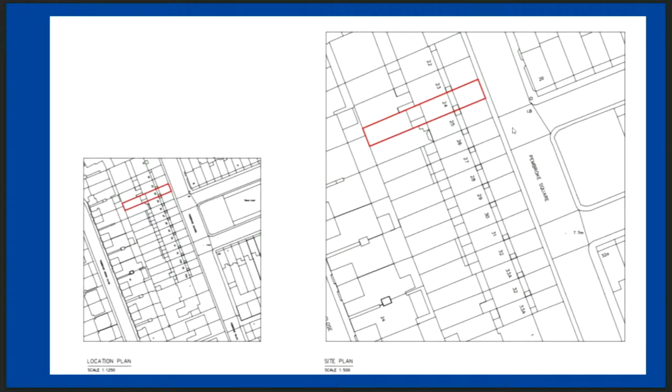As you can see from the front, this is the property indicated by the red dot. It's actually a facsimile of what was there before the war. It was rebuilt in 1949 with the front exactly the same as existing, but the rear somewhat different. Turning to the rear there, you can see it has kind of a 20th century appearance.

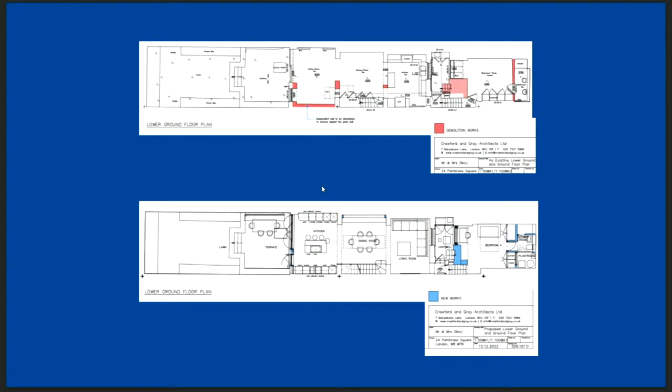Turning to the plans, you can see some of the internal alterations, with the demolition works highlighted in red and the new works in blue.

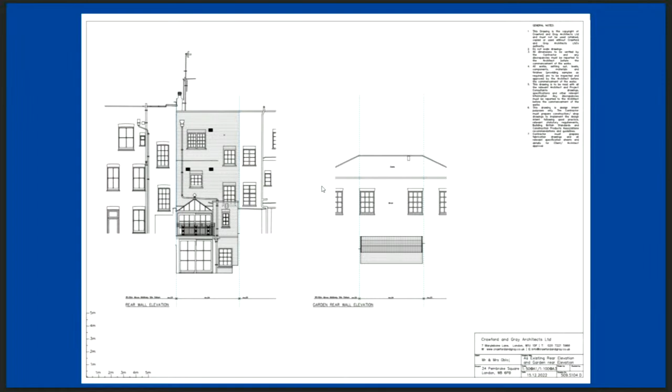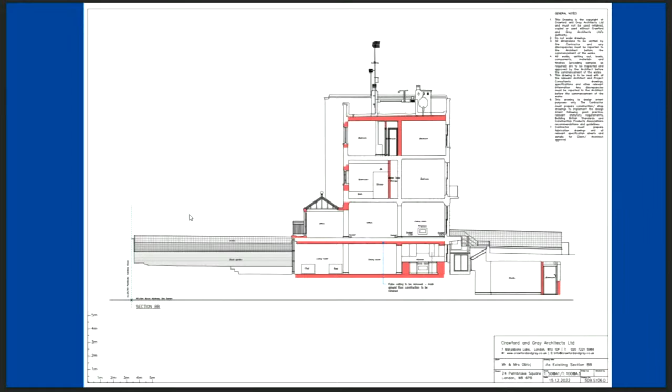Again, some sections through, showing the new works, and there's also air conditioning proposed on the roof to serve the bedrooms on the top floors. That concludes my presentation, Chairman. Thank you.

Apologies, thank you, Lorna. Just to draw members' attention to the addendum report, because we have sought to amend condition 10 on both applications, which relates to the fireplace and how that is secured to be installed before the development is finished and complete. Thank you.

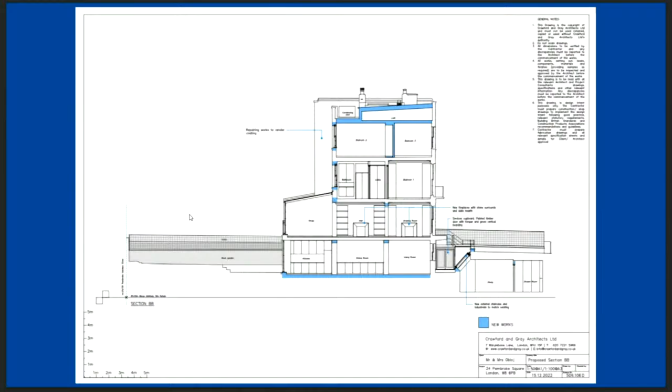Good evening all. I'm speaking tonight on behalf of Tim Honour, who's at number 25 Pembroke Square, and wish to raise a few concerns which are meant to be constructive criticism and helpful.

The first concern is the significant disruption it will cause for, in our view, very little benefit for the owners. The significant number of beams proposed means the disruption will be worse, for little benefit. That may also harm the character of the home by creating large open spaces perhaps not in the nature of the properties, but we appreciate that's entirely subjective. Others may have different views.

Turning to the proposals, the air conditioning unit, in our view, is an unnecessary luxury in our current climate, especially in buildings that have basements. In fact, in many listed buildings, outdoor air conditioning units are banned by planning authorities. There are concerns over noise and vibration, and it's difficult to see how the unit will be adequately maintained once installed, so some assurance on that would be useful.

The unit, combined with the proposal to enlarge the windows, will clearly cause deterioration in the EPC, surely the opposite of policy given the climate emergency. It may provide some comfort if planning conditions ensured suitable installation on all of these issues.

The extension to the rear appears to be taller and deeper than others already in place. The additional building will reduce the light into 25 Pembroke Square on the landing, as well as limiting the outlook and giving a sense of enclosure. Whilst I'm sure the statutory light rules are fully complied with, it will clearly reduce light to a steep set of stairs, which seems dangerous and unnecessary.

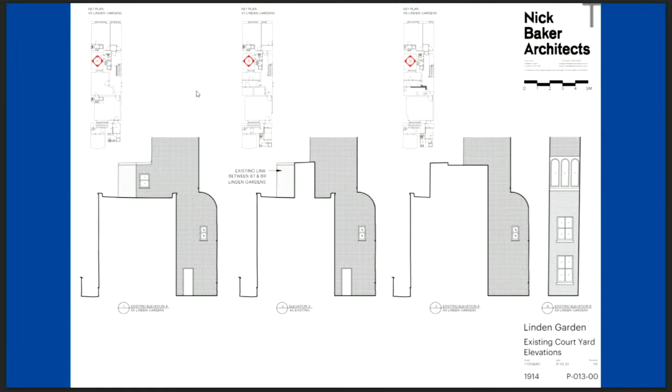Overall, the changes to the building officers see as very positive in terms of the impact on the people living there. As currently arranged, there are lots of very small units. If you look at paragraph 6.2 of the officer report, it explains exactly the layout and arrangement as existing and compares it to the proposed.

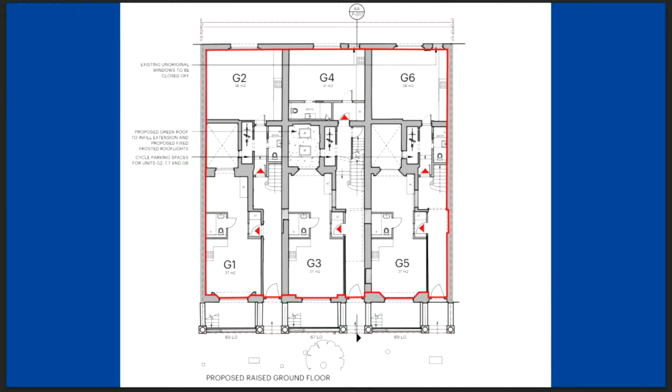I think this is really important because what we've had to do as officers, and what members will be looking at this evening, is balancing out whether the new arrangement is better, which we are happy that it is. But I'd draw your attention to unit G4 to the rear of the raised ground floor, which is slightly smaller than existing and slightly smaller than we would normally expect, but it's still on balance better overall within the building, as with some of the other units at lower ground floor level.

So officers are recommending approval and are happy to answer any questions. Thank you.

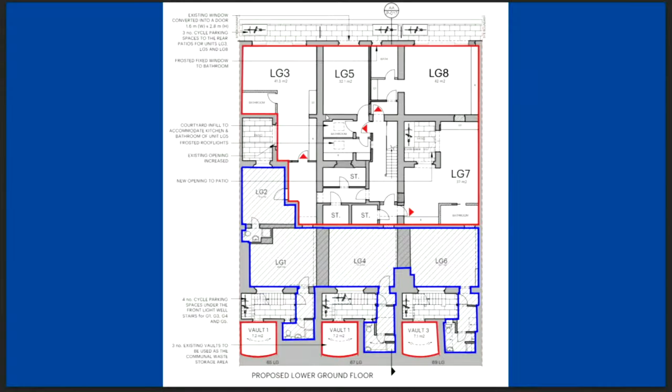So again, we have speakers for this, so I'd like to ask Sebastian Millett, please, for the objectors. You have 3 minutes, sir. Do you want to put your microphone on? There you go. And if you could speak into the microphone, then we all can hear it.

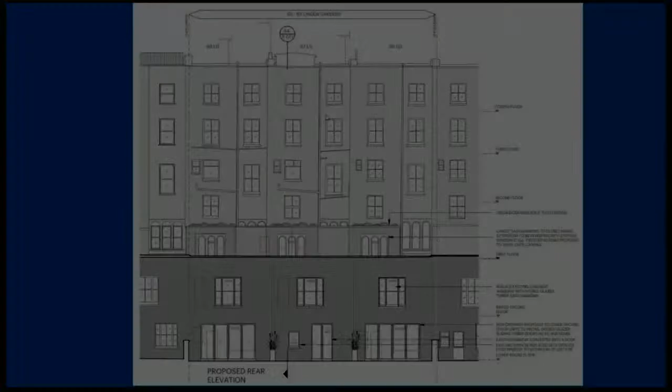Seeing those large sliding doors just puts the fear of God into me. My children are sleeping 3.5 meters away from those doors on the other side of those little backyards. I've lived in that building for 55 years, and I know very well how acoustic that well is, where those backyards are. When my children were born and we were bringing them up, we called that backyard, our one, the Whispering Garden, because we knew how much other neighbours would hear their noise when they were playing there.

I don't really understand why it has to be those sliding doors. All the other basements have, like we do, just a normal sash window with a door to go out there, and those doors, when they open, the noise will be absolutely horrendous. It's a studio flat, so that means television noise, not just bedroom, you know, kitchen noise, kitchen smells. There's an awful lot of marijuana smell coming from that building, and has been for a very long time now. I don't know if that's just the nature of small studio flats, but we live and experience everything that goes on in that building ourselves.

And God help us if they are used for short lets and Airbnb, that would just be even worse, with people moving in and out late at night and so on. We're surrounded by Airbnbs in Linden Gardens. I don't understand how any kind of sound baffling could work, which Councillor Joanna Gardiner has mentioned.

My second concern is that there's very little natural light coming down into those basement wells, and I don't know how carefully calculated it's been that this extension of the first floor, the rear first floor coming further out, will affect the natural light for us.

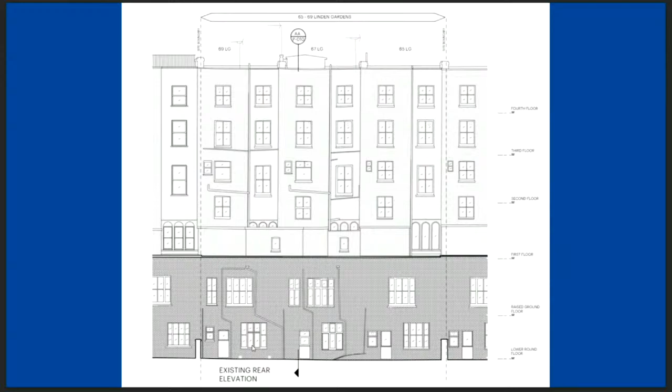So you can see here at this lower ground floor level, there's a door and an opening. So we're looking at the existing openings that are there. And when we compare that to the proposed, it is larger, but not so large in terms of noise to raise any concerns.

In terms of appearance, we're not concerned, again, because it's at the very lower ground floor. We still have a good degree of solid to void on the back there for a lower ground floor level. So that's why we've come to the conclusion in character and appearance terms and amenity terms, we're happy with it.

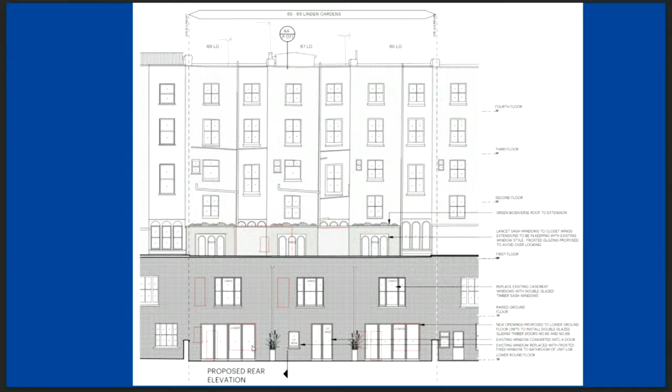Thank you, Chairman. We heard from the applicant in relation to the height of the wall that they would be happy, correct me if I'm wrong, to raise that height to just above head height. I understand from the objector it's just below head height. Is that something in legal terms that we can condition? Is that something you'd be comfortable conditioning?

Sorry to be difficult, I wouldn't really be comfortable with it because I don't know, that could have implications on the neighbours to the back in terms of light or sense of enclosure. Because it is so tight around there, a fence up against their boundary could have other impacts. So it would satisfy noise, but light, outlook, sense of enclosure could be affected.

So I think it would be a case of considering the openings that are there. Is that enlargement of the opening harmful? And going from there, that's the best way to consider it. Thank you.

Any other questions?

Okay, then we need to come to make a decision, and the recommendation is that we authorise the Director of Planning and Place to grant planning permission on the satisfactory completion of an undertaking or agreement to secure the matters of Section 7 of this report and with the conditions listed in Section 9 of this report, or to refuse, as you see in paragraph 2. So, it's recommended the committee to authorise the Director of Planning and Place.

Thank you. Just one slide for you on this application to show you that a basement has been previously approved. The application before you this evening is for details of a condition attached to that relating to contamination, the full wording of which is in your pack. Our contaminated land officers have reviewed the application in detail and are satisfied with the submission.

There has been a refusal on this site to discharge the same condition before because the information wasn't good enough for environmental health, so they recommended refusal. But they are now satisfied that we have the information we need to meet the reason for the condition, and so we've agreed with them and recommended approval. Thank you, Chairman.

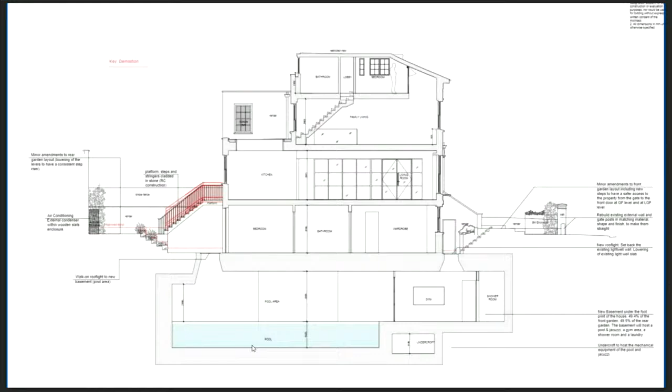Thank you. We do have speakers for this, so Fabio Ganza, who is going to speak objecting to this proposal, to the application. Fabio, you have 3 minutes.

Thank you. Good evening. My name is Fabio Ganza. I'm the owner and resident with my family of 17 Ladbroke Road, the adjoining terrace house. And the text that I'm reading has been agreed with Pierre Muretil of number 13, the adjoining owner on the other side of the applicant.

Considering the mitigation measures and not addressing the contamination risk, we firmly object to the application. This project has two specific characteristics for a residential property.

First, the property is adjoining land that was used for over 30 years as an oil product depot with several underground tanks for a total capacity of more than 26,000 liters. At least one tank was in close proximity to the applicant's garden. Documents produced for the works in that area describe very clearly the situation found and risk posed by the contaminated soil.

Second, the project excavates soil to a depth of 8 meters below the relevant ground level, a depth hardly seen in a terrace house in the area. These two factors make the project deserve a much more detailed approach to the mitigation of contamination risk.

We and other neighbors have highlighted 3 main areas of concern that have not been properly addressed in the application and our officer report. Number 1, soil investigation reached only a depth of 3.5 meters, while the excavation will reach a depth of 8 meters below the relevant ground level. Why has an analysis at deeper level not been done?

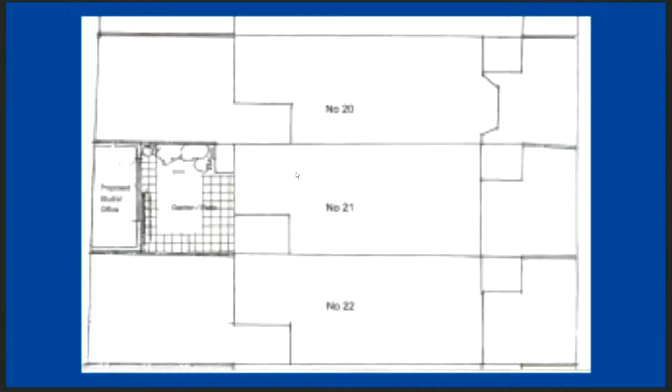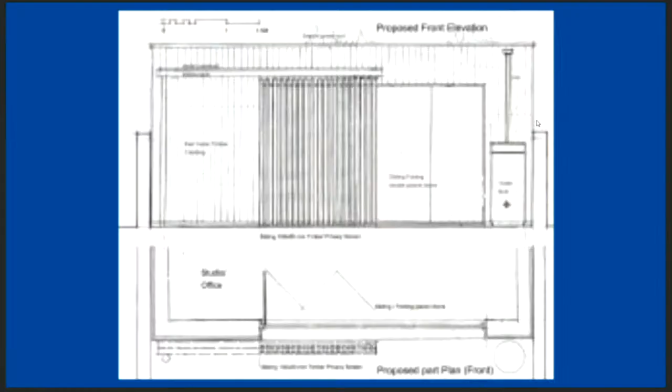Objector: The pictures that you showed of our gardens are deceiving. This building is going to take up quite a big space. It will also project probably 1 metre plus above the walls.

Sorry, what else did you ask me? Councillor Lane: You mentioned in your objections that this was built essentially for profit and that the applicant might be making conference or business calls - my question was... Objector: A developer bought this property at auction, and his only concern is to make as much profit as possible, whatever the outcome. Councillor Lane: My question, just finally, is that this is not principally a planning concern, and I apologise - people are allowed to make profits?

Thank you. But may I just say something else? If it's related to the question - the screens that he's talking about, which will block out light if they are obscured, already face the wrong way to get hardly any light. So I don't understand what light obscured glazing would stop getting in there.

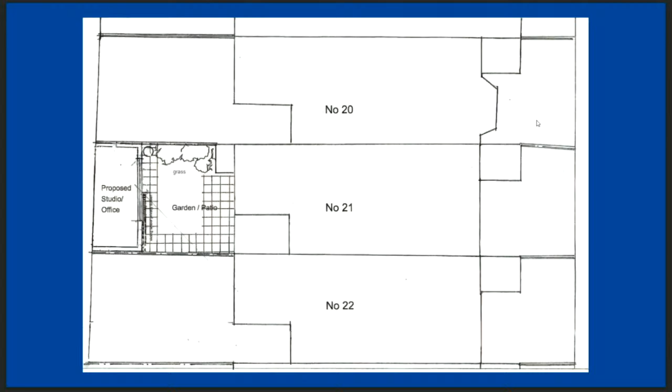Councillor Verboden: A few comments, actually. The first question is: is such a room structure in the garden a common feature in the area? Second, personally I do think that these screens actually need to cover the entire area, but another comment that I saw in one of the objections that I didn't really see dealt with in the report was relating to workmen being able to look into the neighbours' bedrooms in the morning when they started work. Personally, that's something that would horrify me. Has that been taken into consideration so far in the report or in any of the conditions? Thank you.

If I take your first question in relation to any outbuildings within the local area, I'm not aware that we have permitted any outbuildings within the adjacent neighbouring properties. An assessment has been made within the officer's report that in relation to the character and appearance of the local area and the conservation area, it is acceptable to have an outbuilding suitably sized to the rear garden.

But I'm not aware of any within Colville Terrace or this section of the terrace grouping. In relation to any impacts during construction and any views in relation to builders who may be constructing the outbuilding, that hasn't been specifically mentioned in the officer's report, however it has been picked up as part of the objections section. There may be construction workers who would be able to view over and above the boundary wall. However, that would be the same relationship in terms of any existing users of that garden space.

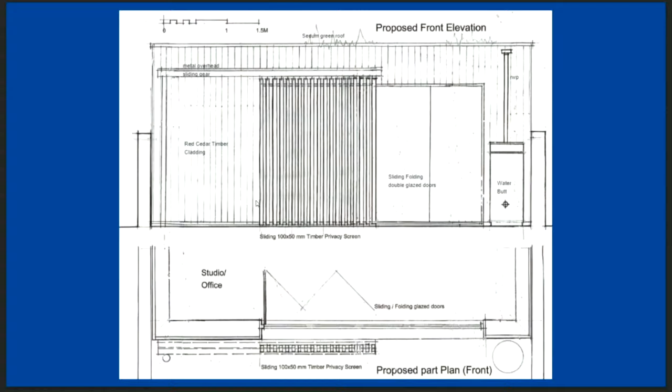It's a bit of a debate to have, but it's very difficult for me to say, sitting in this room, how that screen is effective in providing the privacy it's set up to do. If it's protecting residents from harmful overlooking, obviously there has to be some light and the place has to be usable as well. I'd want officers to use their experience to come up with something workable. That just seems to me to be something that slides around and doesn't necessarily do anything.

So, Councillor Mackover, are you wishing to propose that? I think that's all I could do to help on this with what we've heard from objectors. They're asking questions about the privacy screen, and I am as well - not sure how it's going to work. It would be better if officers could make sure it has its desired effect and is usable. But other councillors might have a view as well.

Well, you're proposing that. Is there something substantial there to go in as a condition? So we've got condition 4 at the moment, which requires the submission of the materials. We could add an additional requirement for the details of the timber screening, including how it operates. Yes. Would somebody like to second that?

Councillor Lane. Okay, so proposed by Councillor Mackover, seconded by Councillor Lane. And unless there are any other questions, Councillor Lane.

A quick question to Ms Culver from me, Mr Chairman. We've heard about the sedum green roof and the objectors saying it will die due to lack of light. Do officers agree, and is there alternative flora that would do better in the shade?

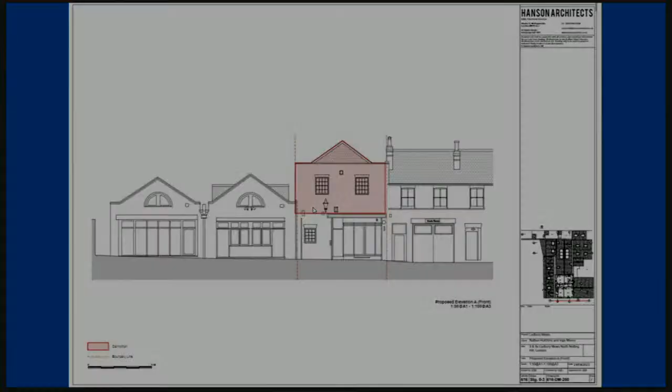Good evening, councillors. I speak on behalf of the Pembridge Association. A key point of our objection was to do with that structural soundness. The engineer's report, as provided, doesn't, as other parts of the application do, imply an immediate need for demolition or an immediate risk of collapse.

We were disappointed that the applicant didn't seek a dangerous structure notice from building control, as we would have expected prior to the application being made. The structural engineer's report also claims that there'll be no disruption to the party wall, but this has already happened. Since buying the property, a number of drills have been driven into the living space of 5 Brunswick Flats, as you can see from the attachment to the objection from that property.

Whilst it's not within your care to decide party wall matters, I understand it is within your care to decide on the basis of impact on neighbouring properties and disruption to this party wall. We've not been assured by the structural engineer's report that that is true. There's no specific assurance. The use of appropriate building materials and the reuse of existing brick and timbers wherever possible is something we should always strive for, especially in the conservation area.

In principle, we don't object to this building being brought back into use, but our duty as a conservation association is the protection of the character of the conservation area, and we're unable to do so given the limited amount of information supplied in this application.

Under 6.5 of the officer's report, it stated that little detail has been given of how the existing brick and woodwork would be used. I understand the conditions go some way to rectifying this, but they do not go as far as we would like.

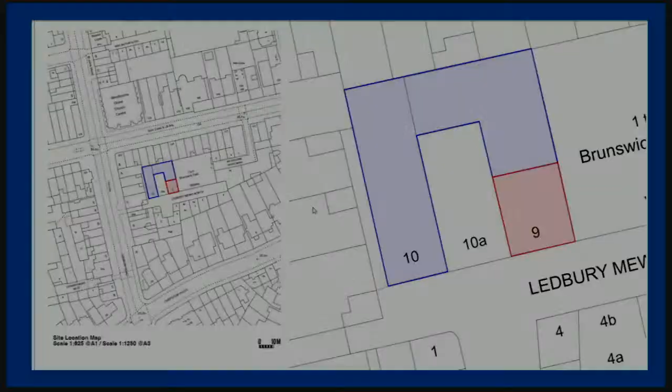Councillor Lane: Thank you, Mr. Chairman. Just one question for me, and it also relates to a written objection from Mrs. Fleming-Brown. I know it's mentioned in the objection that a higher floor is being proposed to the Mews elevation, out of character. I do note in officers' response to objections you say no additional story is being proposed, but is any additional height being proposed? I must admit the drawings were quite a lot of them, and I couldn't really tell. So is any additional height being proposed? And if so, would you consider that out of character with the area?

No additional height whatsoever. It's just an exact replica of what's there. So we've made no assessment on whether it would be acceptable or not. There's just no additional height.

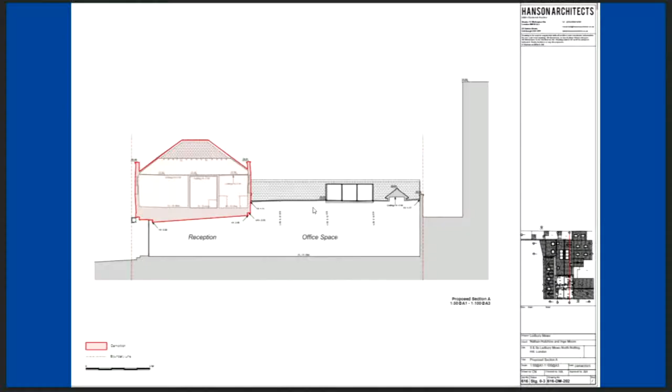If I may just follow up on that, in your opinion, why do you think so many of the objections believe there's additional height or an additional story? Has something been misinterpreted? I don't want to assume, but I have - it's that when you look at this building in context on the street, I should have got a wider view for you, but you can see that there are lower buildings and this is the highest one. So when you look at the elevation, in simple terms, it looks like it is higher, but it's not. We've checked that. The existing and proposed drawings are identical in height, and I actually spoke to the agent directly just to clarify why exactly you're doing this, and it's purely for structural reasons, I was told.

Very grateful. Thank you very much.

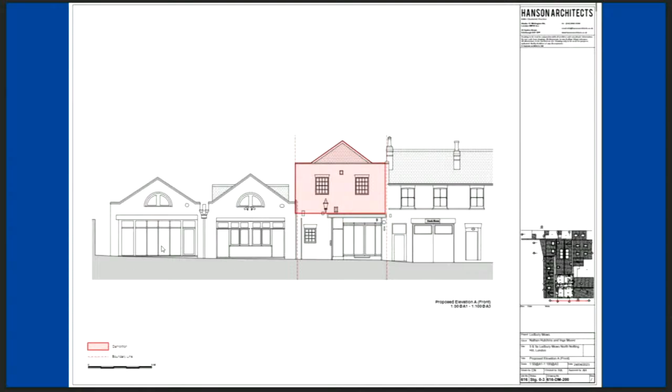Could I just ask about what the objector raised about the roof terrace issue? Could you just enlighten us on that, please?

I think it's on the other part of the site within the blue section, so within the applicant's ownership, but outside the application site. So this is the rebuilding the same, and no roof terrace is proposed as part of this application, but I can't confirm that something won't come forward. The residents probably know better than me what they can see happening on the site, and if something is happening without permission, we can investigate it for them.

But this application doesn't propose a roof terrace. And there's no access from this to an existing roof terrace? Not as shown, so the existing relationship is just being duplicated as part of this application, so there's no new openings or exits out onto it. It's just exactly the same walls and openings. Okay, thank you.

Yes, I would like to propose that. No, I assume the standard wording of our condition. Yeah.

We now then need to go to a vote, please. It's recommended that the committee grant planning permission with the conditions listed in section 8 of this report, plus the additional condition we've just talked about there. Would all those in favour please raise their hands? Anybody against? That is granted. Thank you very much indeed.

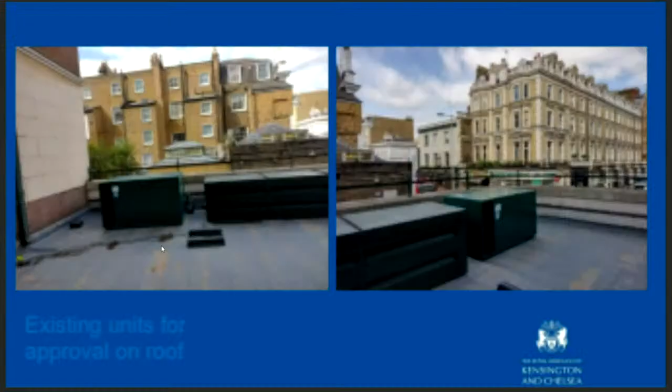Thank you, Chairman. Planning application retrospective of the installation of an air conditioning unit and a refrigeration unit. I think there is a slide on this, actually, just to show you, for illustrative purposes. Again, there are no speakers, accordingly no presentation has been prepared. Recommendation is to grant subject to the suite of conditions as shown in section 8. Again, happy to answer any questions or points of clarification.

Thank you. Any questions for the officers on this application? Okay, then we need to move then to vote. It is recommended that the committee grant planning permission with the conditions listed in section 8 of this report. All those in favour, please raise their hand. Anybody against? That's carried. Thank you.

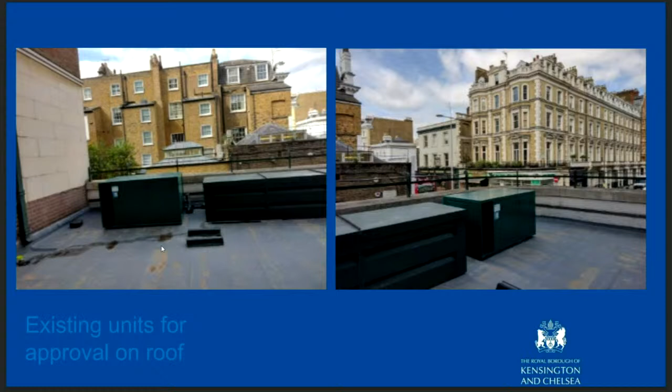59 Park Walk. Again, just give it 2 seconds to find our papers. Next to the back. Who's going to just introduce this?

Yeah. Thank you, Chairman. I draw your attention to the addendum. Paragraph 1 has been changed. An amendment has been made to correct the name, correctly identify the order as a Town and Country Planning General Permitted Development England Order 2015 as amended.

Paragraph 3.1, an amendment has been made to make it clear that Park Walk School is a Grade 2 listed building. Paragraph 7.3, the words 'or loss of privacy' have been added to the end of the paragraph. Paragraph 7.8 is amended as follows.

In February 2022, subsequent to 2 previous approvals at number 75 and 57 Park Walk, a High Court case, CAB Housing Limited versus the Secretary of State for Levelling Up Housing and Communities, provided clarity on the interpretation of the wording 'external appearance of the dwelling house' in part AA2, brackets 3, brackets A of the General Permitted Development Order.

The High Court looked at 3 appeal decisions where prior approval was refused by a local planning authority and their decisions were upheld by a planning inspector. The High Court ruled that the external appearance of the dwelling house is not limited to its principal elevation or any side elevation fronting the highway, or to the design and architectural features of those elements. And the control of the external appearance of the dwelling house is not limited to impact on the subject property itself, but also impact on neighbouring premises and the locality.

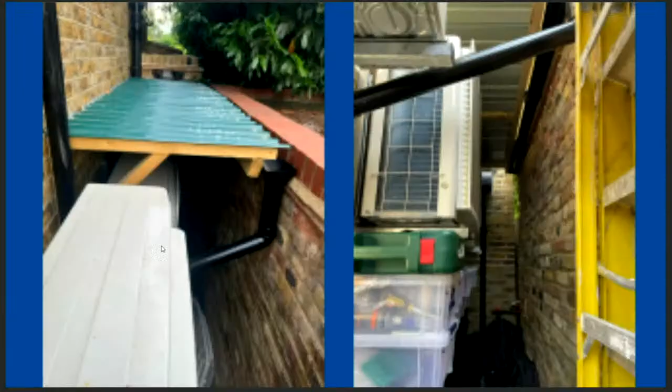I'd draw members' attention to the North addendum. We, as officers, confirm this application is retrospective, so there's no requirement for Condition 1, the time limit condition, as the air conditioning units are already in place. We are also seeking to add an additional condition, Condition 4, relating to the timber and metal covering shown in the photographs before members this evening. That condition states it doesn't benefit from planning permission as part of this application. There is also an additional informative, number 5, outlining that it may require planning permission and advising the applicant to contact the planning team. That concludes, happy to answer any questions.

Thank you. Any questions on this application for officers? Nope. So we then move to a vote.

It is recommended that the committee grant planning permission with the conditions listed in section 8 of this report. Those in favour, please raise your hand. Anybody against? No. That is granted. Thank you.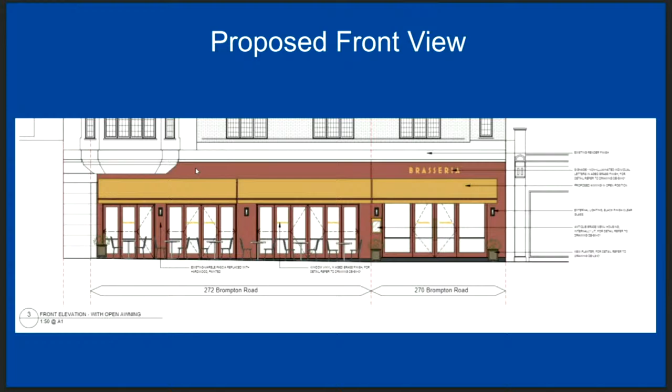So we are now about to vote on application PP/23/04050. And the recommendation is to grant planning permission with conditions listed in section 8 of the report. Those in favour, please raise their hands. That is granted, nobody objecting.

So, guide me on this next bit then. And then it's that reference under there, which is the second application. So we now move to the second application, which is 04086.

Is anybody going to say anything on this, or do we go straight to a vote? Thank you, it's just to point out the difference there, as the boss has said - it's the revolving door principally is the difference there. Okay, thank you, any questions on that?

In that case, we go straight to a vote on, remember again, 04086. It is recommended the committee grant planning permission with the conditions listed in section 8 of this report. Those in favour, raise their hands. Anybody against? No, that is granted.

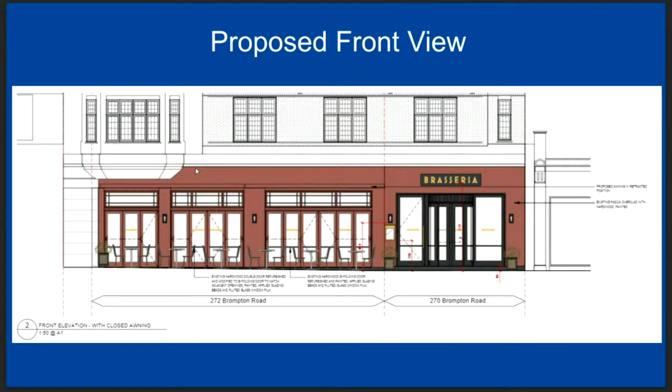Thank you, we now move to 26 Old Church Street. I want to just find your notes for that, which is the end of that pack. Who is going to take us through this? Just introduce it.

Thank you, councillors. Yes, seeks permission for the development as described on the front sheet. Again, as there are no speakers, no presentation has been prepared. Recommendation is to grant subject to conditions, and I think a legal agreement with that one. Let me check. Obviously happy to answer any questions or points of clarification.

Draw your attention to the addendum. Reference to policy CL1 has been substituted for policy CL2 in paragraph 6.2 and 6.5 of the committee report. The words 'street scene and wider conservation area' are added after the words 'host property' on the fourth line of paragraph 6.13 of the committee report. Thank you.

Thank you. Any questions to the officers? In that case, we move to a vote.

Recommended the committee authorise the Director of Planning and Place to grant permission on satisfactory completion of an undertaking or agreement to secure the matters in section 7 of this report and with the conditions listed in section 9 of this report; or to refuse planning permission if an undertaking or agreement under section 7 has not been satisfactorily completed by the 24th of October 2023. So, with the addendum.